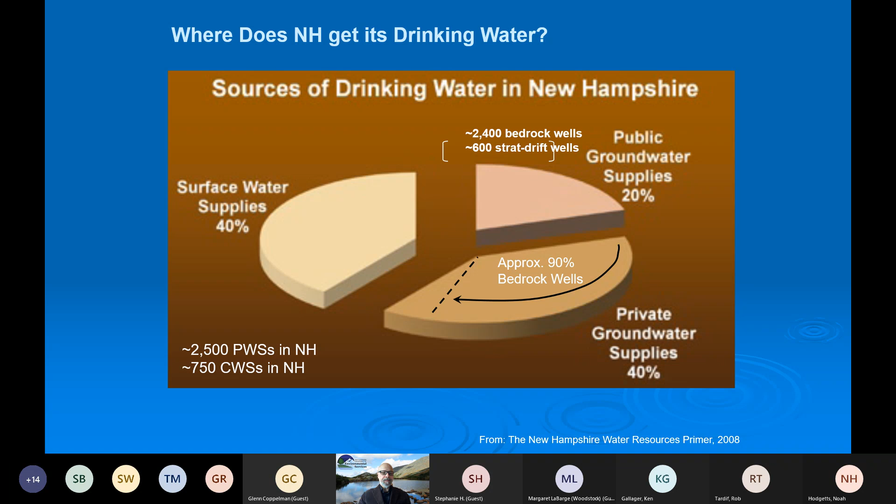Point well is a common feature largely in near shore or lakeside environments, not so much outside of an environment strictly like that. Dug wells tend to be relic sources these days, but they still get installed every now and then in the state.

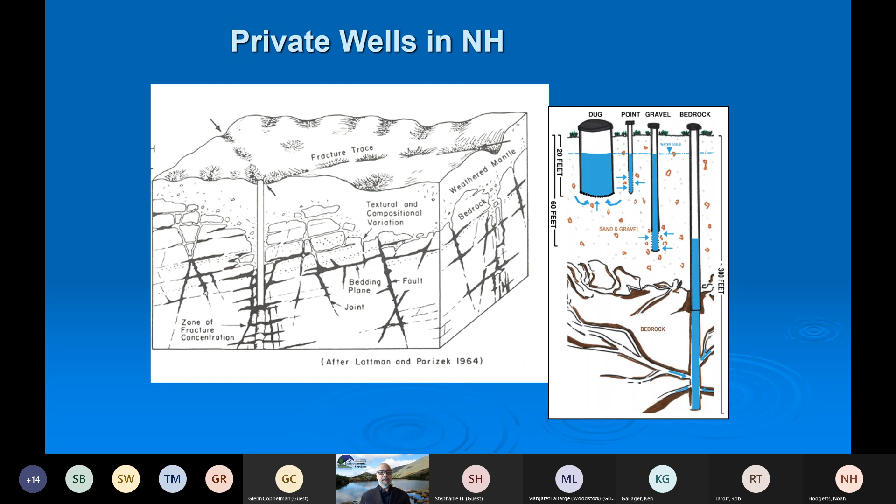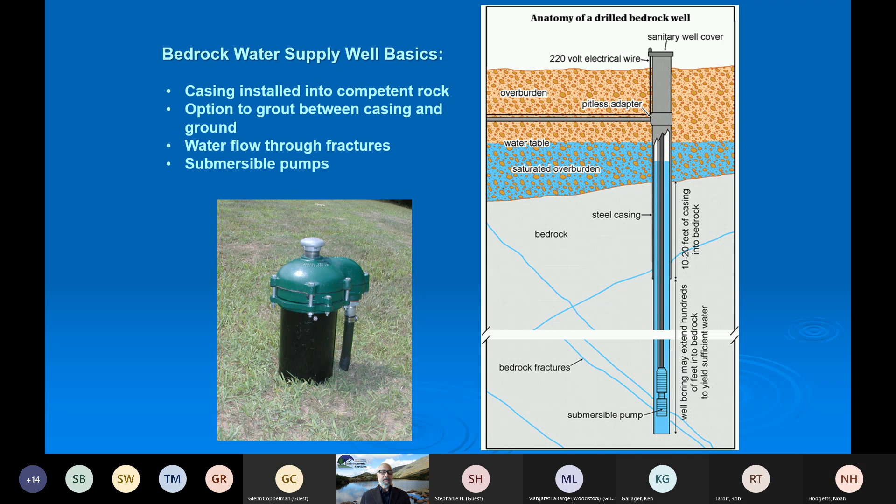Close up of what most people have in their backyard who are served by private wells in the state. Basically, the casing that sticks above the ground is a very small portion of the entire well. Effectively, that steel casing usually extends 20 to 40 to 50 feet into the subsurface. In some instances, as much as 150 to 180 feet until the surface of rock is encountered. It advances into rock some distance, not a long distance, and then the well just becomes a drilled open hole feature after that. Water tends to flow obviously through a fracture network, hopefully at a rate that the user doesn't exceed, and provide water to the home or structure.

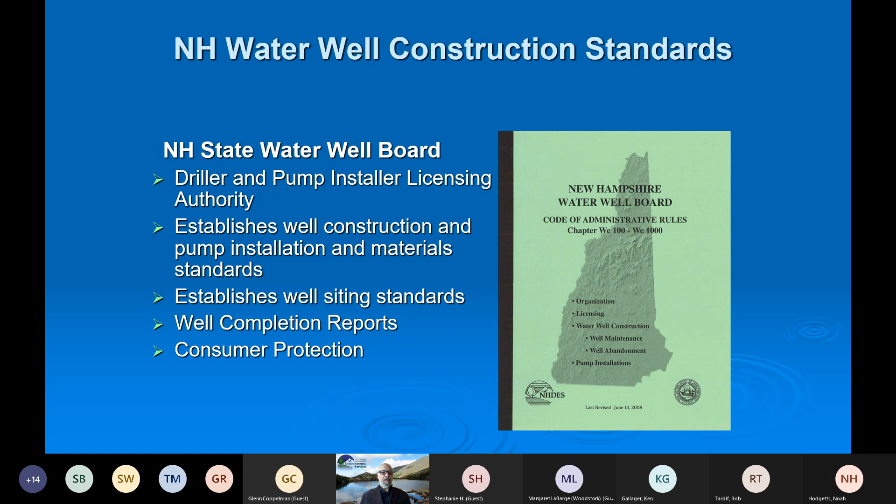The state's construction requirements related to private wells and public wells actually are embedded in the state's New Hampshire Water Well Board construction code. This code book defines not only the well construction standards that apply to installing and drilling the well and equipping it with a pump and fitting it with piping and other materials, it also establishes the authority for the Water Well Board to issue licenses to anybody practicing the business of installing wells or installing pumps in people's homes for potable water supply purposes. In addition, it establishes what the well siting standards are in the state for private wells, not public wells, but private wells. And those standards, some of the siting standards and setbacks, are what I'm just going to briefly touch on today. And then it also establishes the requirement that any water well driller in the state that installs a well must submit to the state a water well completion construction record, identifying where they installed the well, what it's used for, and the typical construction parameters of the specific well they installed.

Now, what has been noted over the last 10 to 15 to 20 years is that we've got a relatively substantial increase in the number of setback issues encountered due to the fact that lot sizes are becoming smaller. Lots are being developed on property that no one ever really thought was developable due to steep slopes, proximity of surface water, or wetness of a particular area. More and more we are encountering requirements for drillers to follow the setback reduction program within their rules in order to install a well on a property without necessarily meeting all the setbacks. These setbacks can be reduced conditionally on a case-by-case or lot-by-lot basis if the driller takes special methods to construct the well.

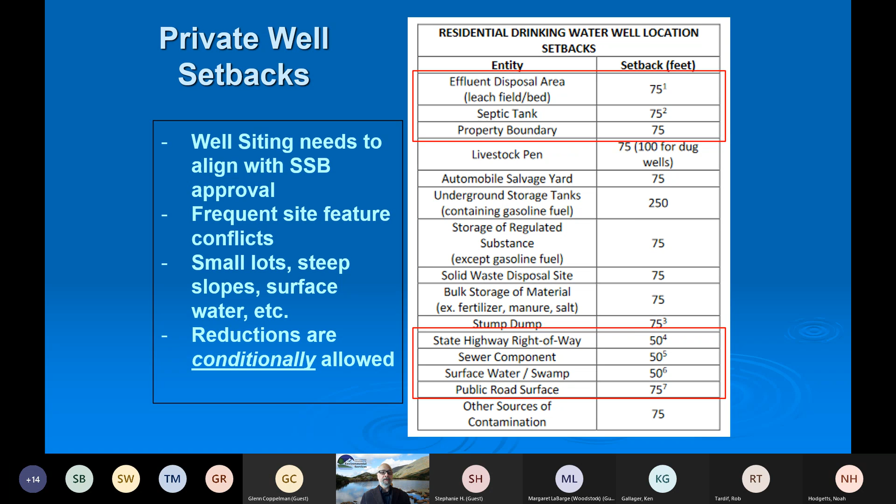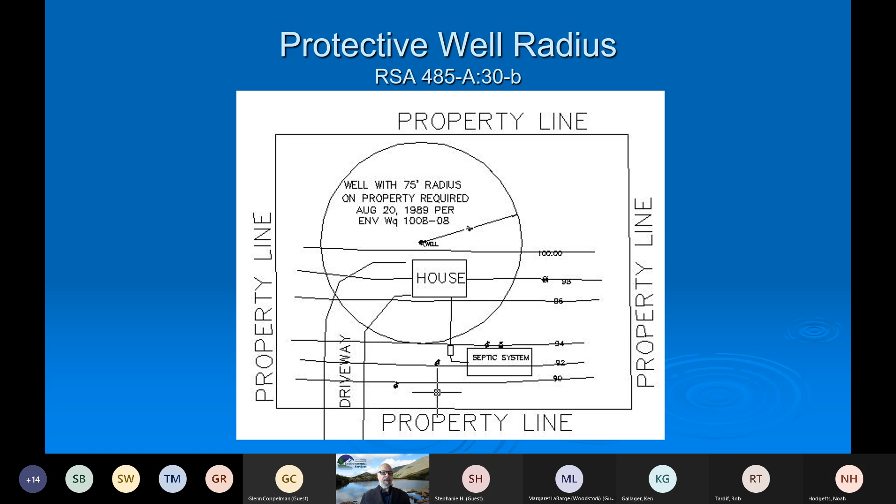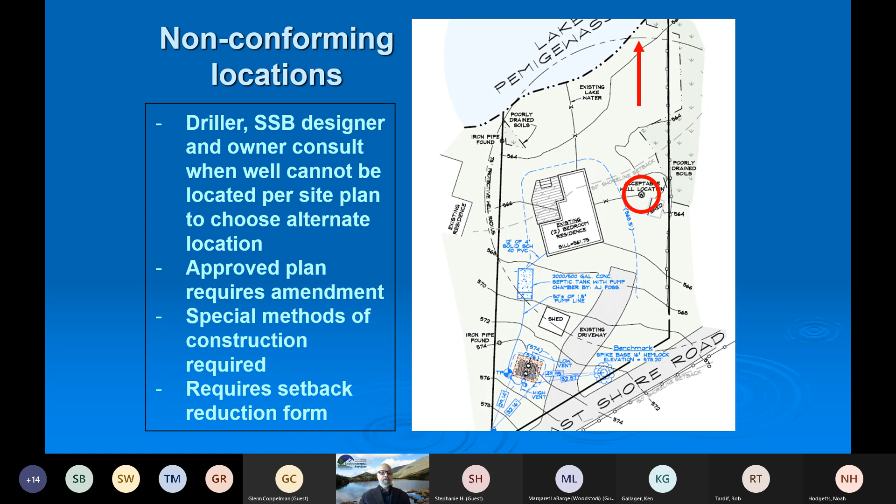So effectively, the closer this non-conforming structure moves to the well, the more casing you will need. Now, no one expects anybody to do math in the field. But before I leave this, I want to point out this reduction allowance is for existing lots only, that have an existing lot of record for their creation.

The septic system setback reduction allowance is not extended to newly created lots that are proposing or submitting a new subsurface bureau application as part of their lot creation process. The reduced setback for septic systems or septic leach fields is available only for existing lots of record.

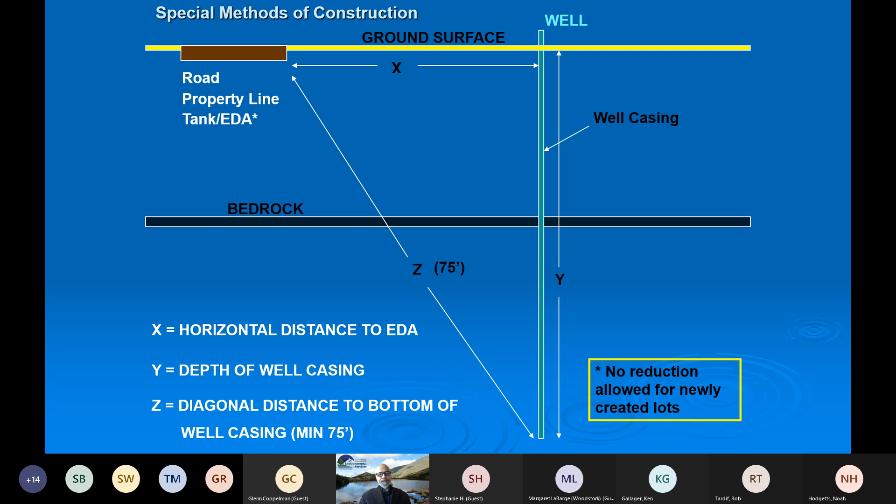So the water well rules available to the water well drilling community include a table within their rules where they can just look up the distance they have to reduce the setback to, run across the table, and pick up the required minimum of casing they have to install in the well to meet the special method of construction criteria. So it's pretty easy for contractors to follow this process.

Additionally, at the private well level, the 75-foot protective radius around the well is, under the rules, allowed to overlap onto neighboring properties. I'm not going to go down that path too much because Rob Tardif is going to touch on it in his discussion about subsurface bureau requirements.

But it is allowed, protective radii are allowed to overlap onto other lots. That overlap is identified in the subsurface bureau application, and it requires a release form where the owner of the well with the overlapping radius has to sign, acknowledging that they're overlapping onto someone else's property, releasing that entity of any liability, and acknowledging that they can't hold any neighbor to restrictions on the neighbor's property.

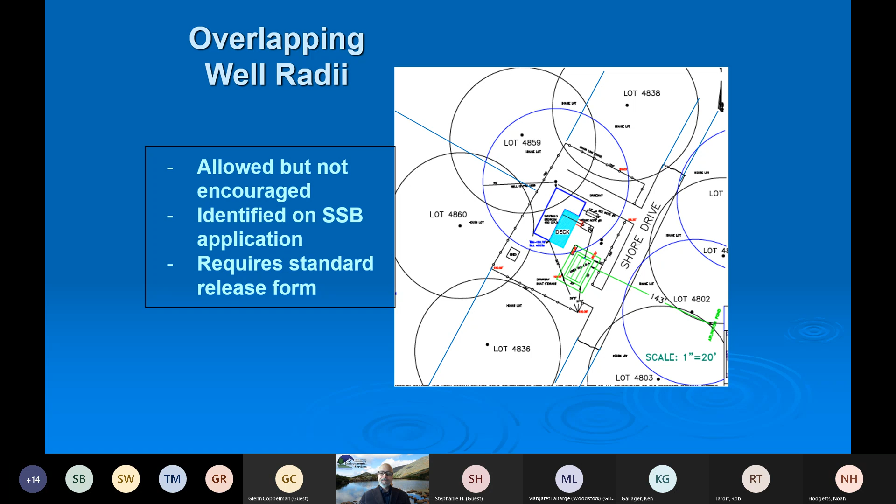Now, Noah asked me to touch on water quality testing, and I need to state flat out: within the state of New Hampshire, there is no requirement to sample private water supply well water quality. There have been numerous legislative attempts over the years to establish a private well water quality testing standard, either on new home construction or real estate transfer, but those efforts have not been successful.

The department, however, sees this as a substantial public benefit to have private well sampling. We have a staff member dedicated to private well sampling outreach, and multiple programs running concurrently to offer and encourage private well owners to sample. It's tethered to the fact that public health in this state is tethered to the water quality coming out of private wells, and we live in a state with substantial naturally occurring contaminants that do have public health impacts over the long term.

Here's our recommended list of water quality standards, or sampling program, that we recommend to private well owners. A lot of it's focused on naturally occurring contaminants, but we've also added perfluorinated compounds for good reason, and VOCs associated with the ubiquity of those cultural contaminants in groundwater in this state.

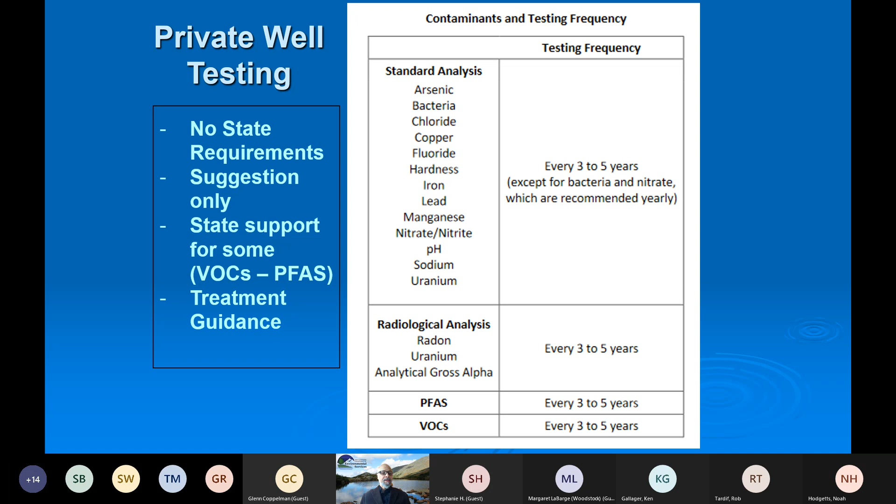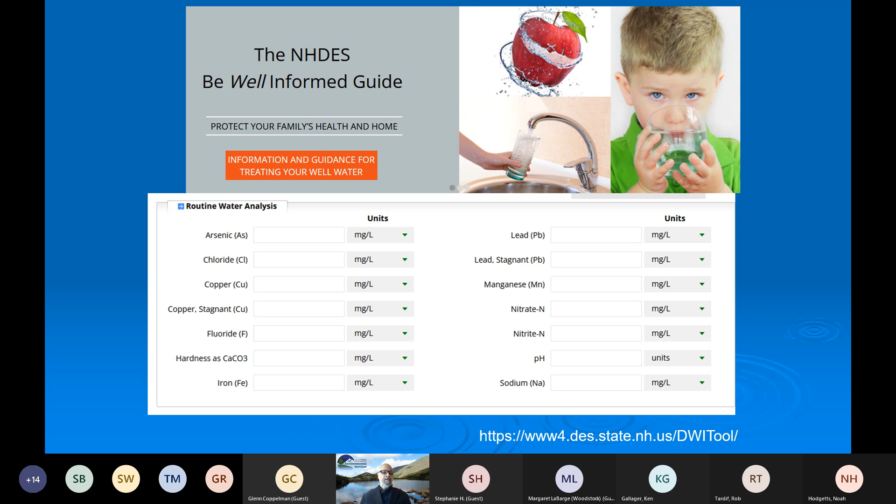We also provide a website where someone can log in and enter their lab data for their water quality, and not only get a summary of which parameters exceed drinking water standards, but also a detailed breakdown of the type of treatment that will work to reduce that contaminant below the drinking water standards. It's received a lot of national recognition, has been taken by the EPA and converted into common code, and many other states have built their own sites mimicking it. It's a very successful program.

Now moving on to public water wells, community water supply wells in the state. A community water system is a public water system that supplies the same population of 25 or more people year round—cities, towns, villages, precincts. But additionally, small water systems also include cooperatives, manufactured home parks, condo complexes, homeowners associations, as well as standard single-family home residences built in an open space or cluster subdivision, which are commonly small community water systems.

The requirements for small community water systems are dictated in the state and federal Safe Drinking Water Act, and the criteria for new source approvals and system design are built into the department's administrative rules for well siting criteria and water system design. When I say small community water systems, I mean systems built to serve a population of less than 1,000 people—that's how it's defined in this state. More than 1,000 people served means it's a large community water system, meeting a different set of design standards.

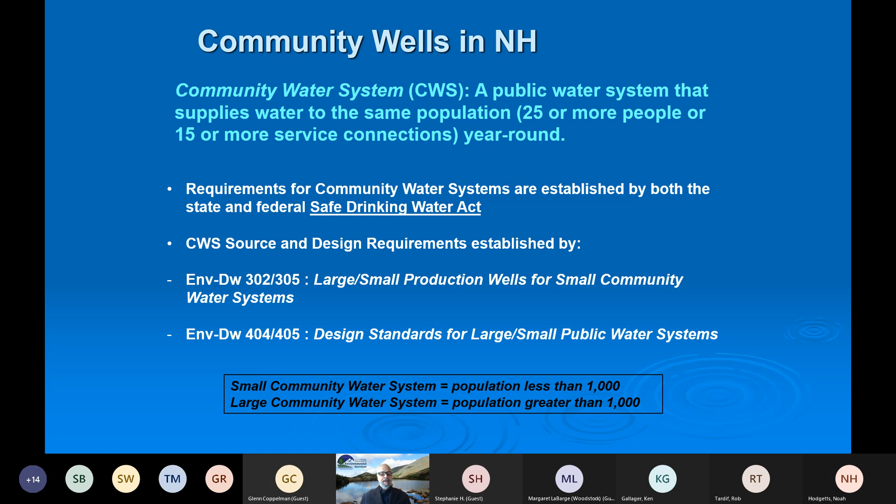So the radius requirements around a community water supply well are very different than for a private well. They are not locked into a max of 75 feet; they depend upon the size of the water system. The radius around a water supply well cannot have any cultural development, must remain in its natural state, cannot have any structures other than what's needed for water supply provision, and can receive no discharge or drainage from any site feature, like a detention or retention pond on the subdivision.

That table I'm showing you on the bottom right is the table of radius distances, or the size of the radius relative to the production volume required to be developed for the subdivision. The example on the lower left is a typical calculation of what's required for a water system based on the number of units and bedrooms.

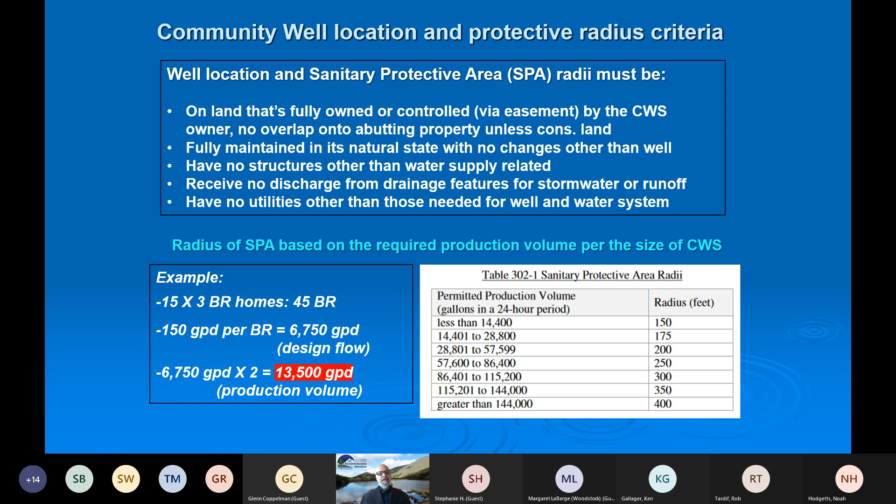The example I'm giving you is a 15-unit subdivision where each unit has 3 bedrooms. The criteria is that 150 gallons per day must be developed and tested for each bedroom, which equates to about 6,750 gallons per day. That design criteria then has to be multiplied by 2.

The highlighted red value, 13,500, is what a subdivision developer has to test for the production volume of their well. Here's a quick example from Kingston, a submittal from last year. This is a 22-unit subdivision with 2-bedroom units, 44 bedrooms total. Highlighted in yellow is what the project needs to develop: 13,200 gallons per day, equivalent to about 9 gallons a minute.

When you look up the equivalent value on the radius, the protective radius around the well is 175 feet, shown in the blue circle below.

A very common practice in an open space or cluster subdivision is to site the well within the open space. It's a very good joint use of that space. As shown here, that circle is bounded by the property lines, does not go over it. There's no development within it, and it's dedicated to providing that area just for the water supply well.

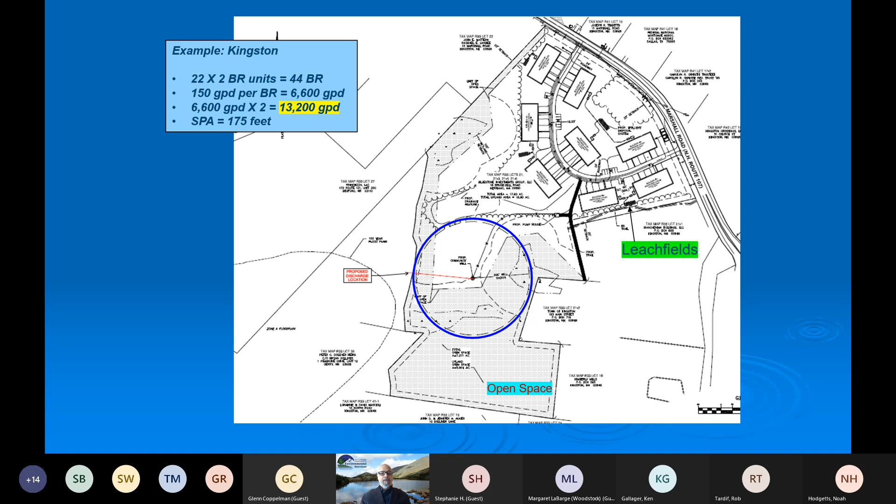The community water system owner has to own or control the well site and the radius via a perpetual easement, which is demonstrated at the time of the application for a new water system.

Again, this particular project points out that the joint use of the open space and the community well is a very supportive joint use.

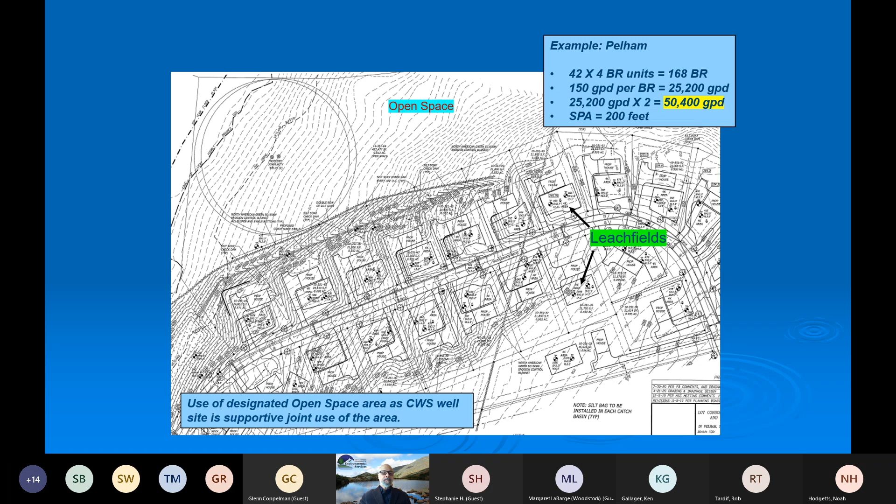That sampling program identifies which parameters exceed drinking water standards and which do not. For those that exceed, it also defines the water system treatment requirements that have to be designed as part of the water system design.

When the water system goes active, there's a lot of scheduled and routine water quality sampling that occurs, starting in the first year and continuing during the whole life of the community water system. Many parameters are sampled on a substantial schedule ranging from weekly to monthly to annually to 3, 6, or 9 year intervals depending on the parameter.

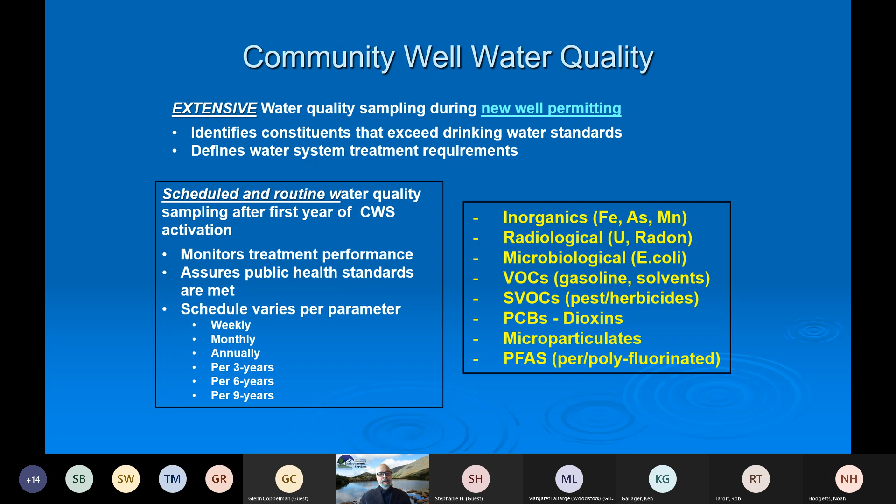Take it away, Rob. And Rob, just before you get started, we do have one question in the chat now from Glenn Coppelman for you, Steve, asking, would a water system for an assisted living facility fall into the category of community water supply?

Absolutely, dependent. If they serve more than 25 people, yes. Okay, great. Thank you.

Good morning, everybody. My name is Rob Tardif, administrator of the Subsurface Systems Bureau within the Department of Environmental Services.

I'm going to briefly talk about our lot sizing criteria. I wasn't intending to get too far into the septic system design criteria, but if there are questions, I can do my best to answer those as well. I'll give a brief overview of the Bureau and how we came to be.

We have the administrative position, which is where I am, and then basically four fundamental groups to the process: the plan review group, the construction inspection group, a small enforcement group, and administrative or support staff who receive applications, give them an administrative completeness review, and answer the phones.

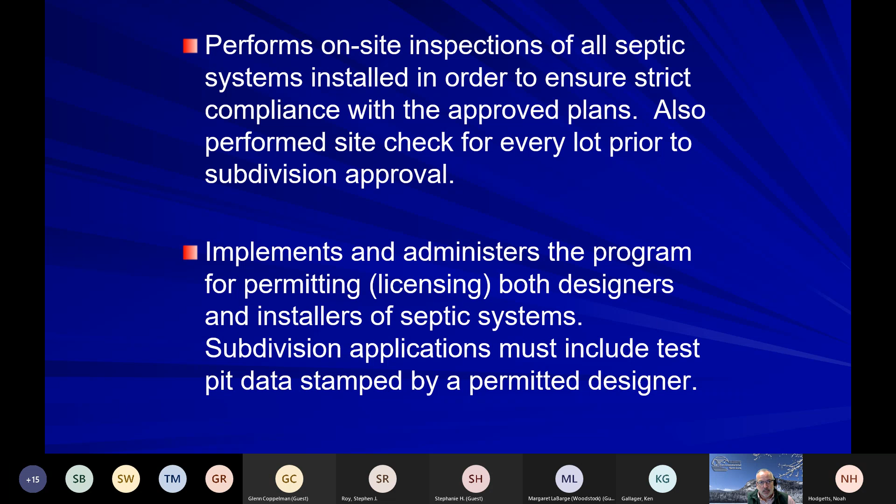Another thing we do is permit all designers and installers in the state. To submit a design, you'd have to be a permitted designer, which is also part of the subdivision application. To construct a system, you have to be a permitted or licensed septic system installer. There are currently provisions in statute allowing homeowners to design and install systems for their own domicile, meaning the place in which they currently live.

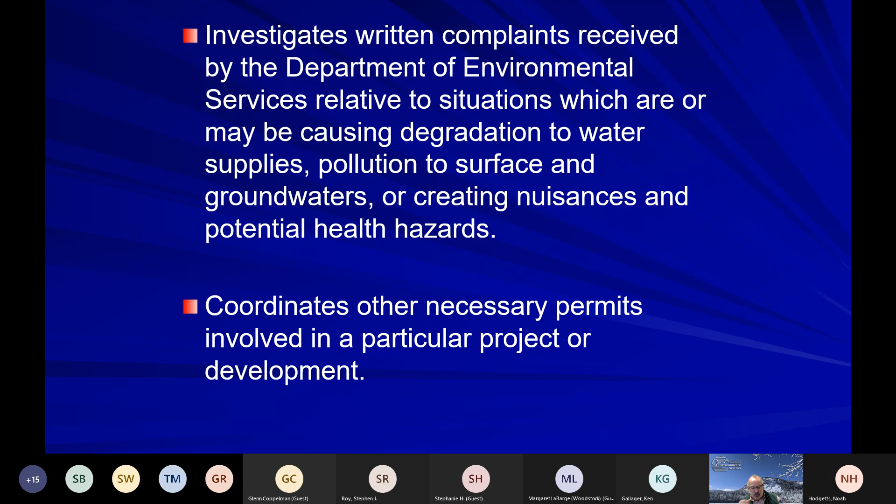Just a real brief history of how we came to be. Back in 1965, there was what was called the island rule: if you were proposing to dispose of wastewater on an island, you had to have an approved system. Back then, it was the Water Supply and Pollution Control Division that would approve these requests.

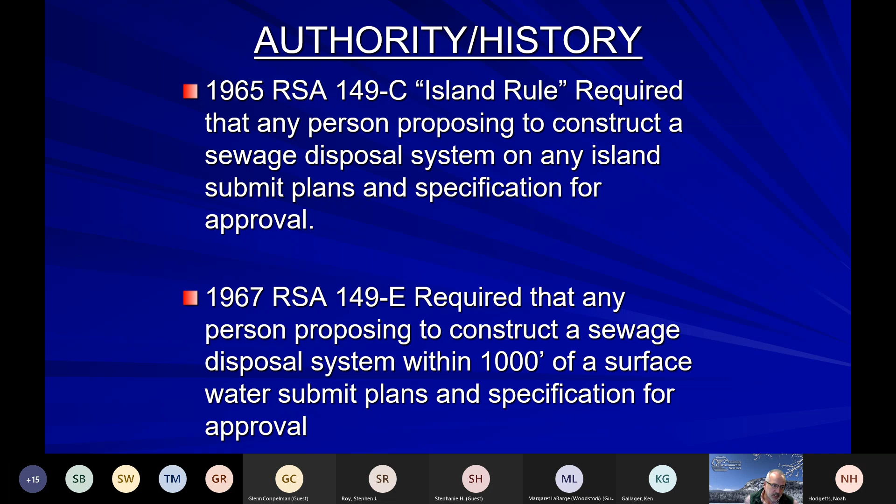In 1967, the legislature said, if we're doing islands, we should do mainland properties too. So it was dictated that anything within 1,000 feet of surface water would need an approval. Later, the decision was made that if we're going to do it within 1,000 feet, let's just do it everywhere. So the language in 149-E removed the term 'near shorelines,' which was defined as 1,000 feet, effectively making it a requirement that any property disposing of wastewater would need an approval from the state.

Again, it was still the Water Pollution Commission at that point. But in 1989, the Department of Environmental Services was created, and RSA 485-A, our current statutes, was codified. So again, that's a brief history of how we came to be.

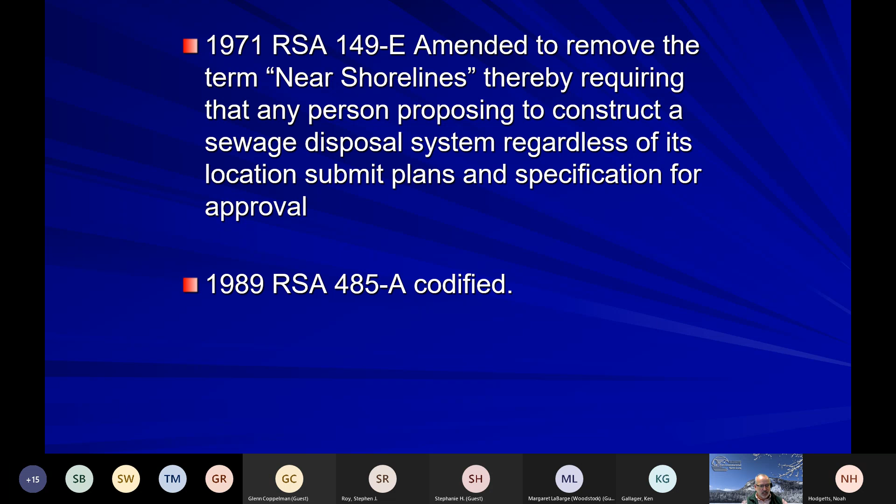So again, I'm going to focus more on subdivision requirements. In 485-A:2, Roman 13, there's a definition of subdivision, and it's a very long definition, so I wanted to break it up into the important parts. It's when you subdivide a piece into 2 or more lots - for immediate or future sale, rent, lease, or building development, you're going to need subdivision approval. There are allowances in the definition for simple lot line adjustments that would not require subdivision approval.

The definition does include condominium conveyance. For instance, if there's a cabin resort, individually owned cabin resort out there, and the property owner wants to sell, and the potential buyer wants to condominiumize those individual cabins, that would take subdivision approval. Those scenarios are most of the time very difficult to obtain subdivision approval because of lot loading, which I'll get into in a second. But in any event, any condo conversion requires subdivision approval.

Then the last bullet here talks about if you have 2 smaller lots and you want to combine them to make a bigger lot, that would not require subdivision approval. Again, there's a very long definition in 485-A:2, Roman 13, that kind of covers all that.

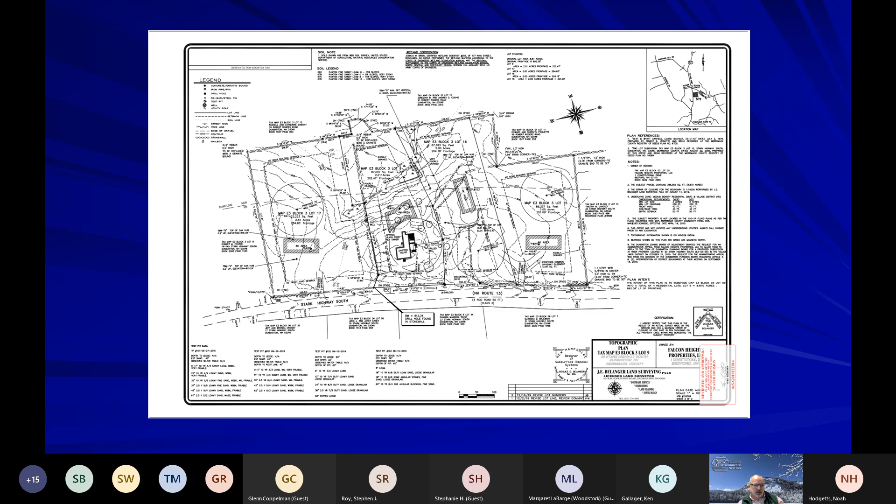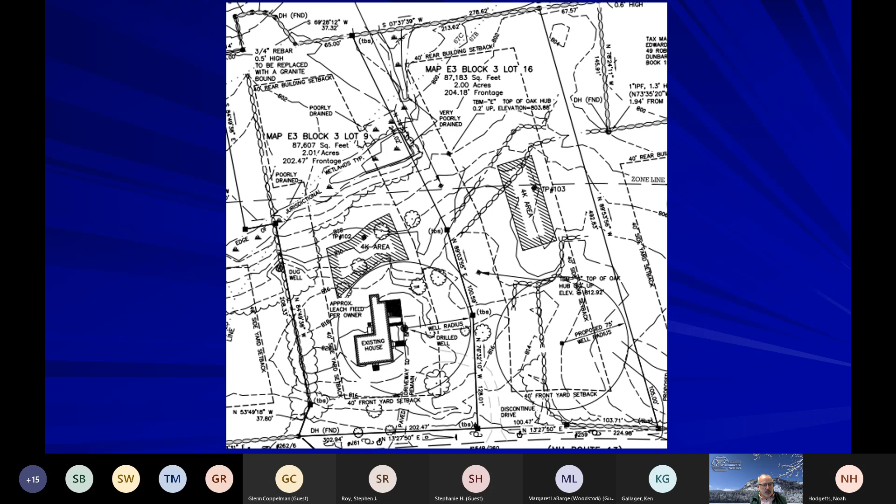At subdivision level, what has to be demonstrated is that each lot being developed can support a minimum of 600 gallons per day. For residential applications, that's a 4-bedroom home. If it's not residential or commercial, it may be different—there's a table in our rules with design flows for specific types of commercial operations. But at a minimum, it's got to support 600 gallons per day.

Keep in mind, a perfect 1-acre lot—well-drained soils, flat, no wetlands, nothing to subtract—can support 2,000 gallons per day by rule. So it's not very difficult to have a relatively small piece of property meet our subdivision requirements. That gets back to my initial point that everything we do is soil-based, lot-characteristic based, not just a general standard.

For instance, when I moved into the town I live in, minimum lot sizes were 5 acres. I don't think there was any technical reason for 5 acres except maybe to limit development. The lot I live on now is 5.01 acres, just enough to meet the town's minimum lot size requirement. So when you go to demonstrate what a lot can support, there is a formula in our rule.

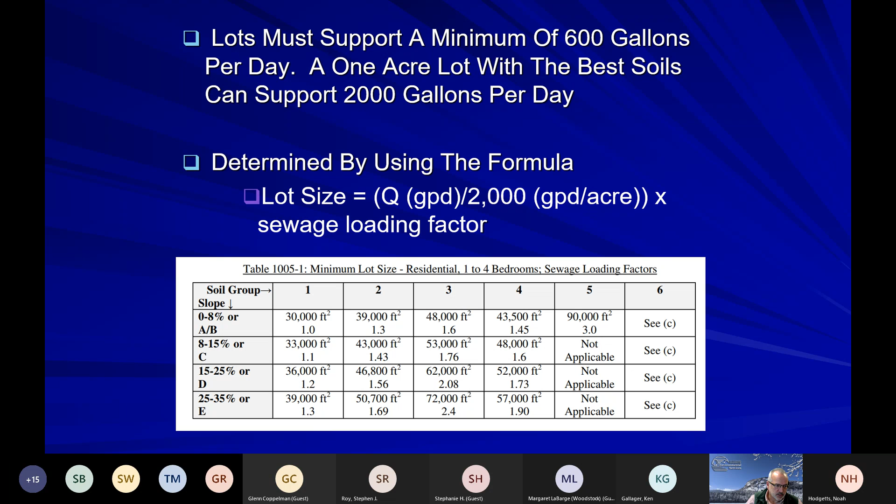On a perfect lot with group 1 soils and minimum slopes, by that table, the minimum lot size would be 30,000 square feet. If you have a property with on-site wastewater but an off-site well, you don't need to subtract that well radius, so the minimum lot size is decreased. And in scenarios where you have off-lot wastewater and off-lot well, we wouldn't necessarily get involved—the minimum lot size would be dictated by town or municipal ordinance.

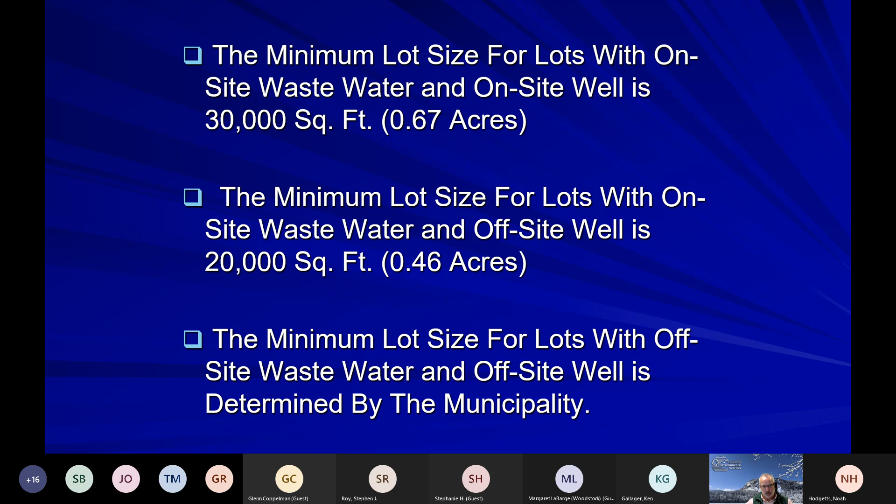So now we can get into conservation, cluster, open space development. There's a number of different names for these types of development. In these scenarios, you can reduce lot sizes, but the bottom line is the amount of land is still going to be pretty much the same as it would be on a standard subdivision, and that's my own term here, not a rule.

What it takes in a cluster subdivision is an open space lot. Between all the property, the smaller individual lots, and that open space, the calculation is still made to determine that the previous parent lot being divided up can still support the sewage load as calculated by that previous formula. So while you can group the houses closer together, the minimum land required doesn't change much from larger individual lots.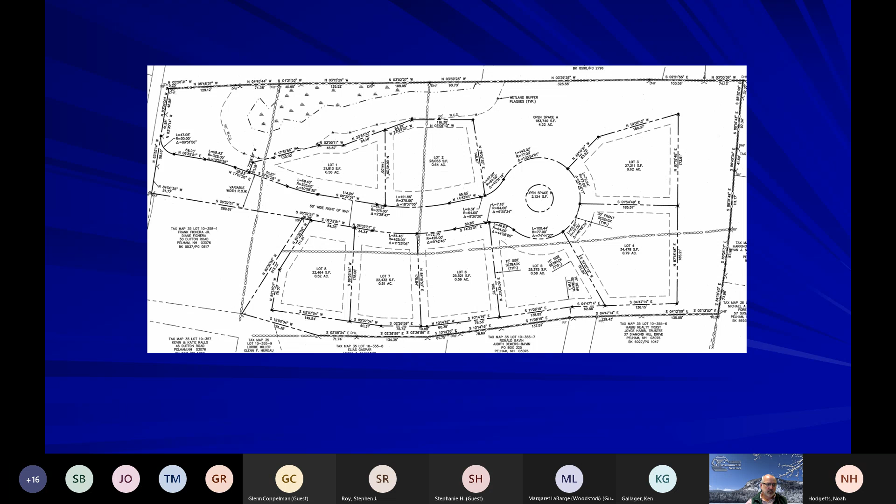So if I go to the next slide, this is more of the development. In this scenario, again, there are many different scenarios for cluster subdivisions. In this case, you have individual wells, overlapping well radii, and you also have that area I was talking about. So in this scenario, it was proposed that each lot still has an individual sewage disposal system, an individual septic system. That doesn't necessarily have to be - you could put sewer pipes in the ground and have that individual sewage disposal system somewhere out here on the conservation land.

Different scenarios for different lot characteristics or different needs or wants by the developer or the potential buyers. There are pros and cons to everything if you think about it. Me personally, I would prefer to have my own septic system. That way I'm not depending on all my neighbors not to do certain things that could prematurely fail the septic system - grease, paint, coffee grounds, all kinds of stuff that people may not think about that they shouldn't be dumping down into their septic systems. If I have control of my own, it's up to me as to how that system is treated.

It's the same sort of thing with wells. Do I want to - and again, this is a personal preference - do I want to have the same water supply and have to pay water supply bills and things like that? Whereas if I have my own individual well, I'm going to be responsible for that well. But again, I'm responsible for that well - I don't share that responsibility with others. So there are a number of different scenarios that can be used in these developments.

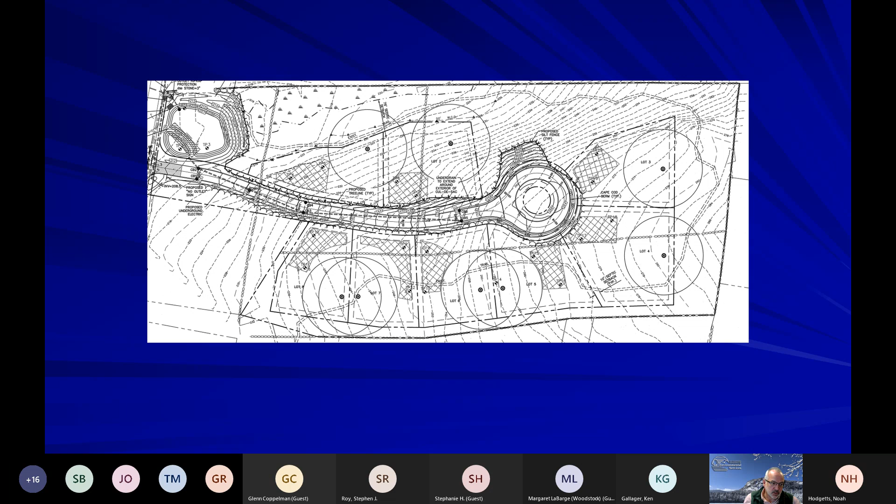Condos are very similar to cluster subdivisions. I mean, again, the bottom line is the parent lot on the condos has to support the sewage load based on the soil characteristics.

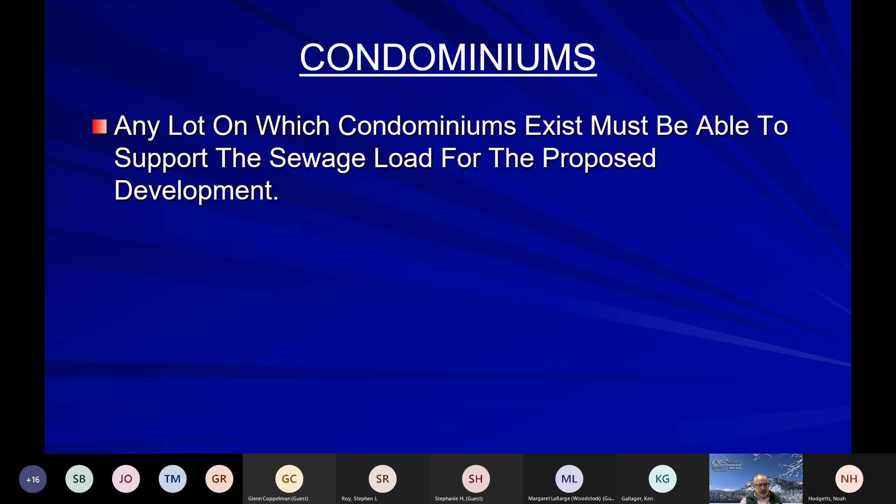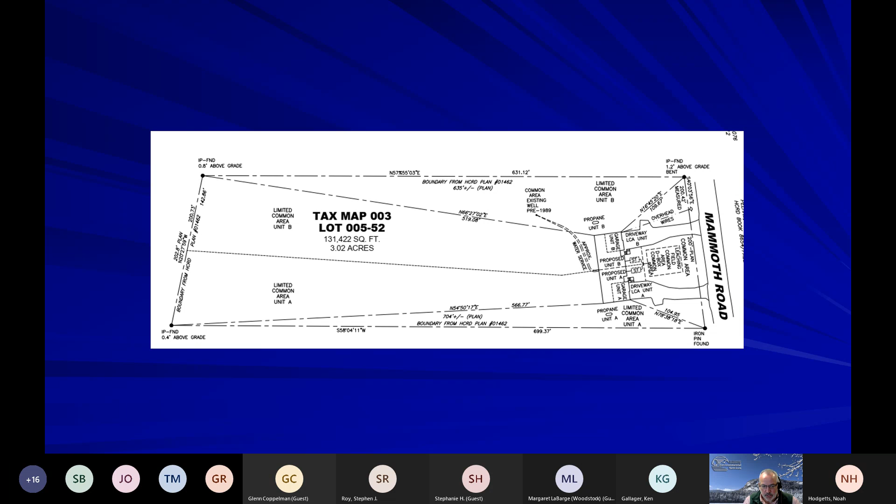And this is an example of just a duplex, a condominium duplex. You can see the parent lot is required to support the sewage load of these two-bedroom condos. You see this limited common area - it's still all common, but this limited common area kind of dictates somewhat of personal ownership, not quite personal ownership, but effectively personal ownership of an area of the lot. But again, the bottom line, the takeaway here is the lot has to support the entire sewage load.

Again, very similar to manufactured housing, it's got to support the sewage load based on soil characteristics.

And I just wanted to end with a quick note on innovative technologies. Those technologies are approved by a committee here within the department. The rules governing those innovative technologies are within the Subsurface Systems Bureau rules, but the committee is made up of people from Steve's group, people from wastewater engineering, people from the legal unit, and staff from the Subsurface Systems Bureau. And these applications are submitted, they document that they meet certain criteria, and then they get approved for use.

The point I want to make on those is what these innovative approvals do is allow for reductions or waivers to septic system sizing and setbacks. The setbacks typically are setbacks to seasonal high water table, not necessarily setbacks to property lines. The real takeaway is that they don't allow for a reduction in lot loading. The thought there is if the innovative technology system fails, we can at least be comfortable with the fact that the lot still supports the entire sewage load.

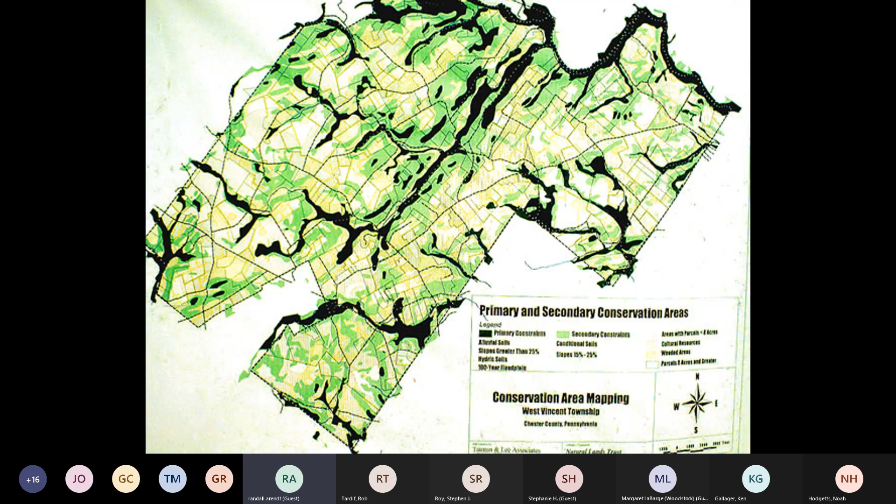Focusing in on a map like that, we can see the conservation lands pre-mapped by the community, which helps developers so they don't flounder around quite as much in terms of where should I put the conservation land? In the woods, on the farmland, where?

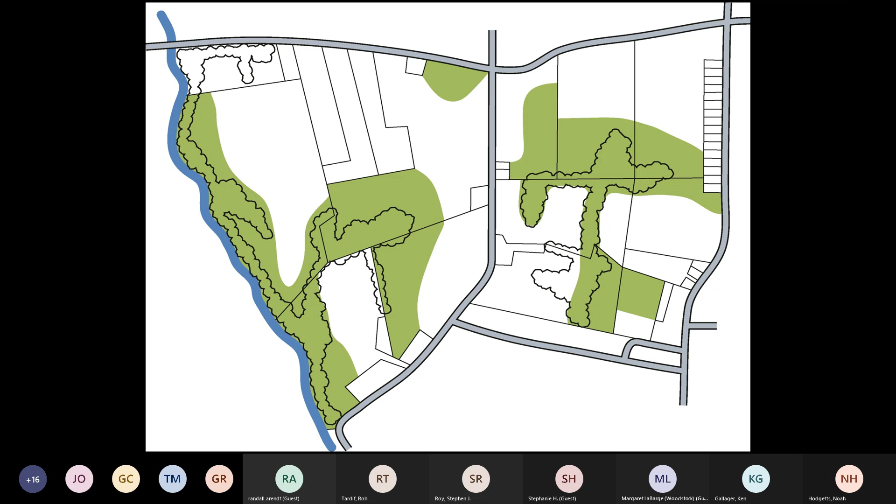And this community basically mapped out its woodlands and the stream valleys that lead down into the rivers. It said, develop our farmland, preserve the little bit of woods we have. This is from York County, Pennsylvania, where woodlands are pretty rare. So in New Hampshire, the opposite would probably be true. You might want to save your farmland, number one, and build in the woods, which are abundant.

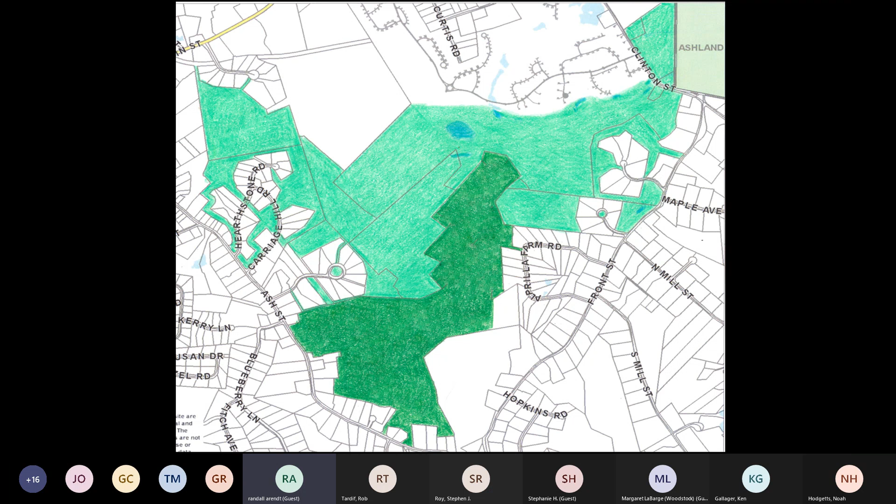This shows the green land in Westford, Massachusetts that was preserved the old-fashioned way, by buying it with public dollars or appealing to landowners to donate easements. All the light green land is land that came through the subdivision design process. Westford, which is almost on the New Hampshire border up near Lowell, adopted conservation subdivision design two decades ago.

Excellent experience with it. Choosing which site features to protect and which to build upon is pretty much your number one decision. If you want to save the woodland, you put the homes in the farmland. And if you want to save the farmland, you basically put the homes in the woodland.

If the lots are too small for both an individual well and an individual septic, a community well could be in the open space, or a community septic system could be in the open space. And there are variations on that too, because for 20 homes, you might have 7 smaller shared systems instead of one large system for all 20 homes.

Site visits are absolutely essential to discover and evaluate the site features. Planning board members, no matter how good they are, can't really tell what a property is really like by looking at a piece of paper. It doesn't work. So this should be mandatory for all planning board members.

If you're afraid of snakes, spiders, ticks, fine. Let's appoint you to the library committee or the finance committee or the school board. You don't belong on the planning board if you're not going to be able to go out with boots on the ground. Now, if you're temporarily sick, you've got a broken leg, you're excused. You're away on vacation, you're excused. But generally speaking, a planning board member has got an obligation to walk the property. Otherwise, they really can't make an honest evaluation of where to put the homes and where to put the open space.

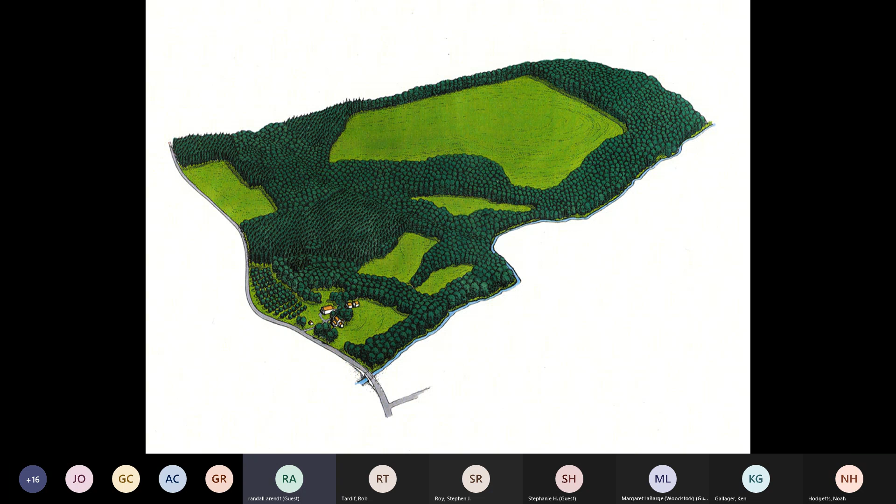So here's a piece of land before development. And this is your conventional yield plan with 1 acre lots in the 1 acre zone, 2 acre lots in the 2 acre zone, 3 acre lots in the 3 acre zone. There's really no open space, everything is a house lot or a street, but it tells you the lot yield.

And I would normally do perc tests on 10% of those lots, which are the most dubious. This lot here is highly dubious with all the green area that is not good for septics. Some of these lots down in here could be dubious. Lots in here should be very, very good for septics. But I'd like to have a 10% sample where the town or the town engineer chooses the 10% of the lots, 3 out of 30, that raises eyebrows. And if those pass, then I suggest that is a good number to begin with for your yield plan, your total lot count.

Now that doesn't mean that you don't get really serious about the septic later on. You do, but are we talking about a 30 lot subdivision, a 35 lot subdivision, a 25 lot subdivision? Developer might come in with an airy fairy make-believe plan, and you got to inject some realism in it. No sense designing 35 lots in a conservation design only to find out that he's only got soil for 30 or 28.

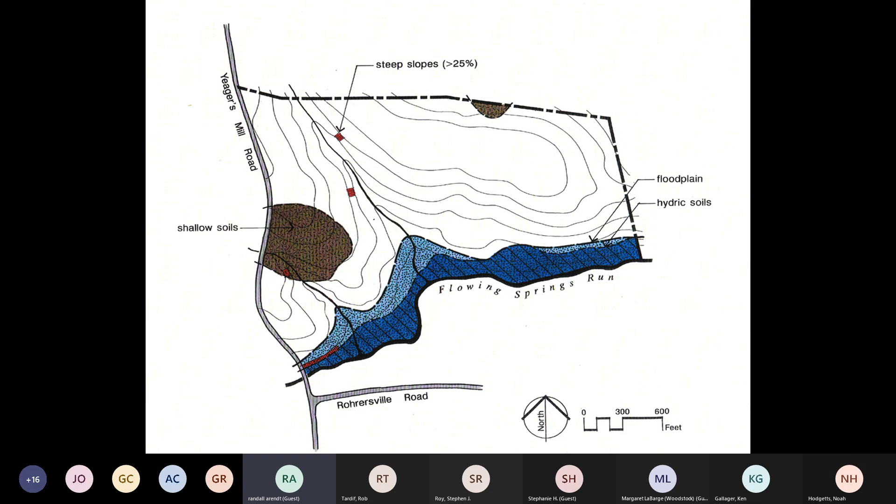So step 1, primary conservation areas, is step 1A: shallow soils, wet soils, floodplains. Then that's what that kind of looks like.

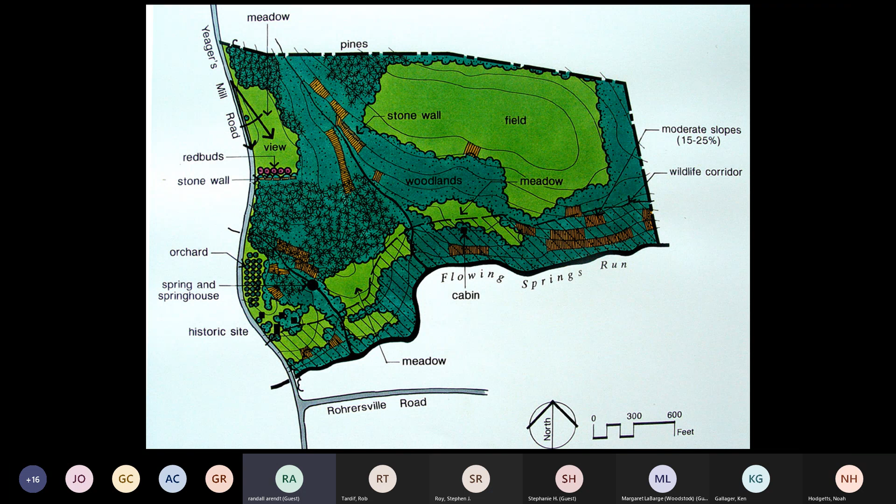And then step 1B, which is secondary conservation areas that are buildable, like the farmland in green, the woodlands in dark green, the historic farmsteads here that you want to preserve, the stone wall that you want to preserve, the view shed in from the public road that you want to preserve. All the things you want to preserve are shown in step 1B. And that is a typical view of upland, which is buildable, but you want to maybe design around the stone walls and use them at the edges of roads or the edges of house lots. Let's get creative.

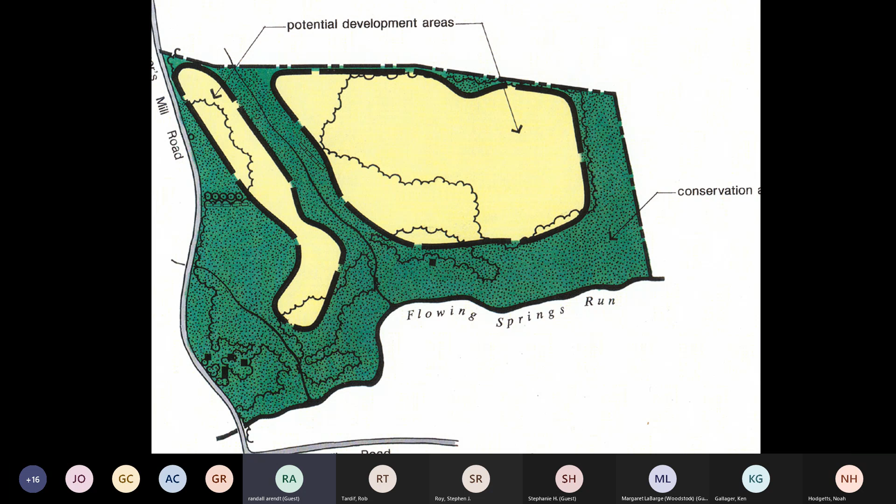So at the end of step 1, you end up with the green areas to preserve and the yellow areas, which are fine to build on and not the highest priority for preservation. So step 2 is to populate the buildable areas with the houses that meet the yield plan number.

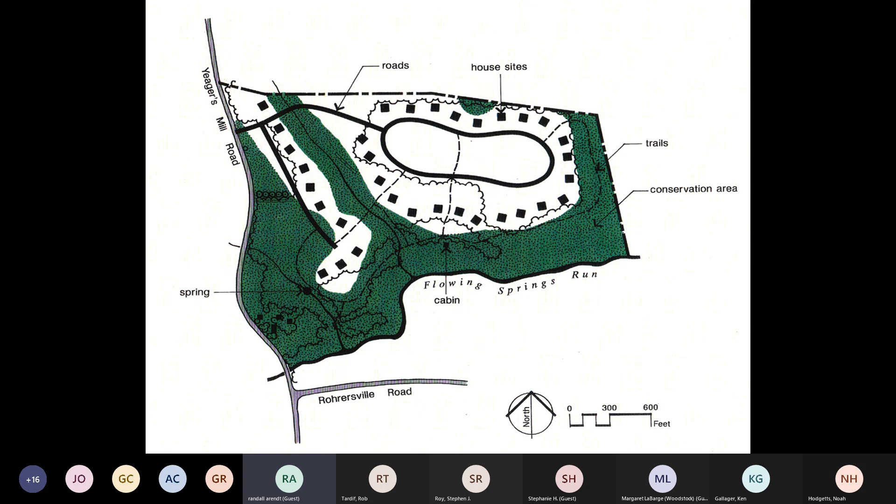Then this is where the engineers come in big time with streets and trails and roads and septic system locations, and then drawing in the lot lines, which is the least important part of the whole thing. Legally, you don't even need them. You could be totally condominium. But most people like lot lines, I do, and I put that into step 4.

I've got these slides I can give you if you want to do a presentation in your own community. I do presentations, used to do them with carousel slide projectors years ago. Then we often do hands-on design exercises after the slideshow, so people move little M&Ms around and put the houses in the areas that are not green-lined as conservation areas. It's a very helpful learning exercise for planning board members that typically follows one of my presentations.

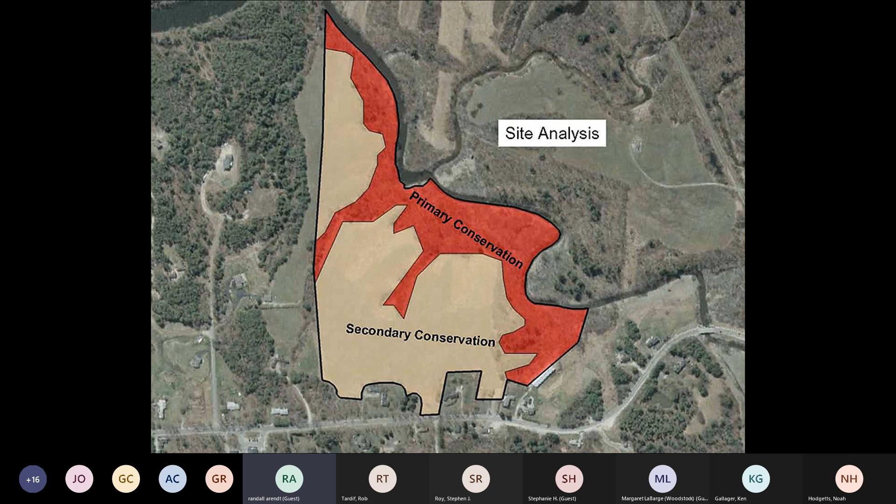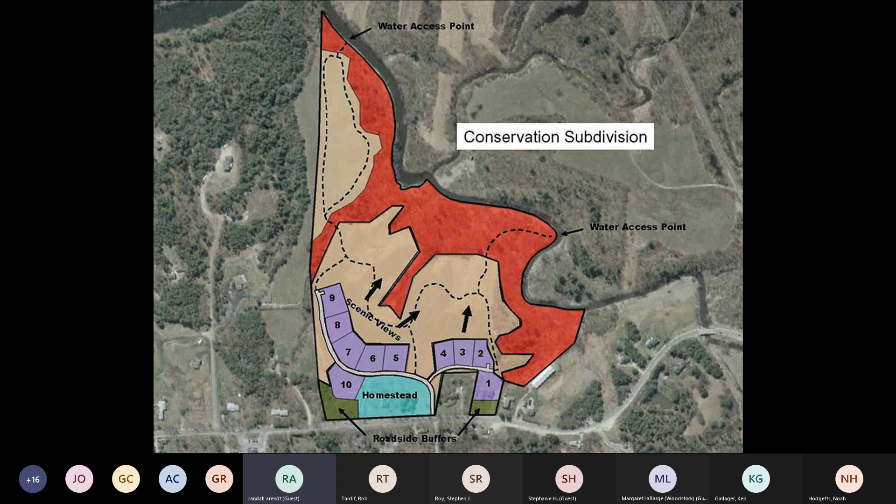The developer says, well, where do I put my homes? And the planner says, well, you put your homes on part of that secondary conservation area, like that. How's that? The developer says, well, I like that because it's a much shorter, cheaper street system. Everyone's got a beautiful, uninterrupted view of permanently preserved open space. And the septic systems, if need be, can be off lot as individual systems in the common open space, or they could be community systems, maybe a system for 3 units here and a system for 5 or 6 units over there. Many variations.

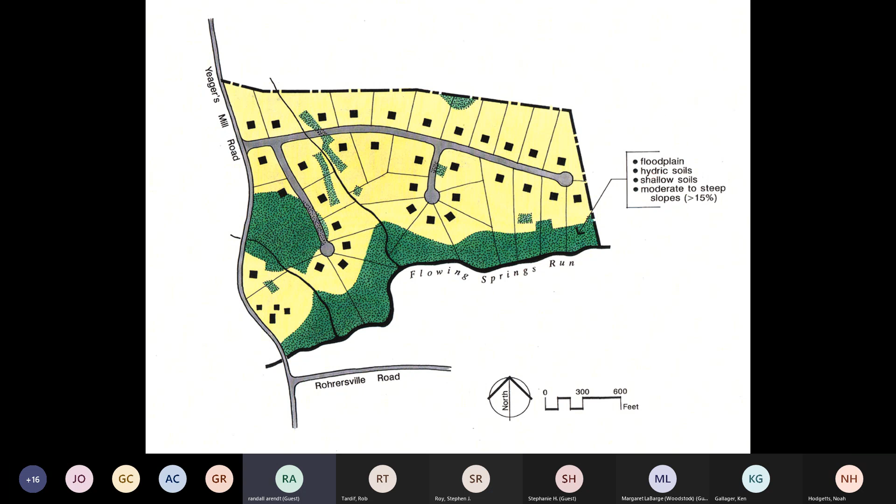Before the preliminary plan is submitted, you really need to compare 2 sketch plans: the yield plan that tells you what the normal configuration and lot count would be, plus this conservation design based upon that lot count. Here are 2 sketches too, your conventional sketch, and then converted into a conservation design.

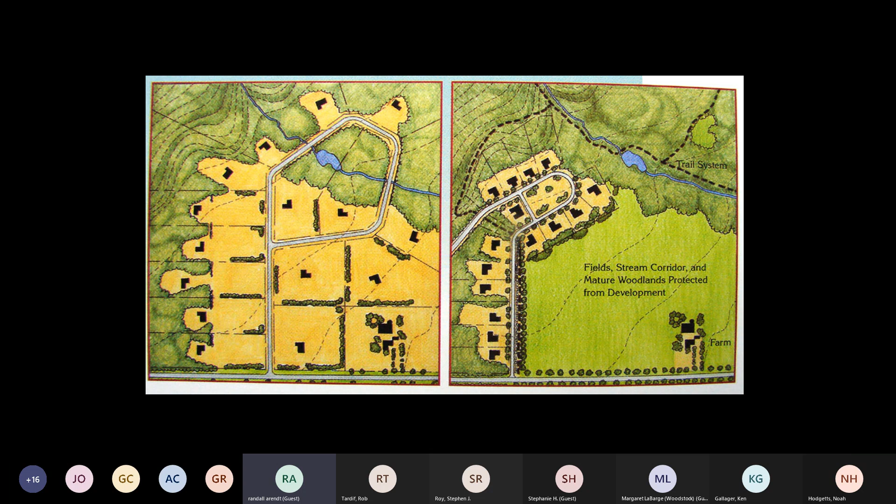Another example here, this is a sad story. The town came to me after the preliminary plan was submitted with the plan on the left, and they said, can you design something better? I said, I can, but it'll go nowhere because the developer has already spent $65,000 engineering the preliminary plan on the left. So he's not going to turn around. But they use the design on the right as a learning tool and a teaching tool for future developers.

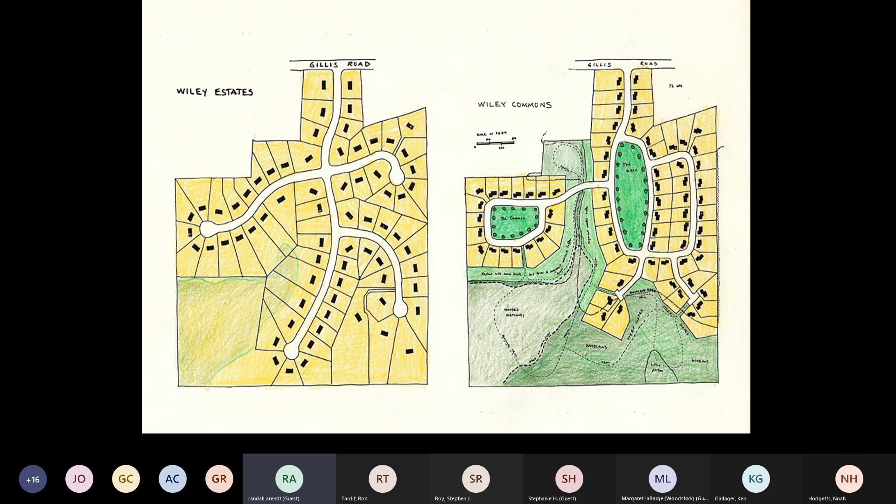So once a developer comes in with a preliminary plan for a conventional design, basically it's game over. He's not going to change.

As an extension to a village, we could do plan A on the left or plan B on the right, so the village can have some playing fields, so the village can actually have a village green. And the new village green for the entire village could be right there. So you can really make up for deficiencies in an old village that doesn't have such things.

And I mentioned Westboro, Mass earlier on. As of almost 10 years ago, they'd preserved about 450 acres of land with conservation subdivision design. Didn't have to pay a penny for it. Other towns in Massachusetts preserved 650 acres, 875 acres.

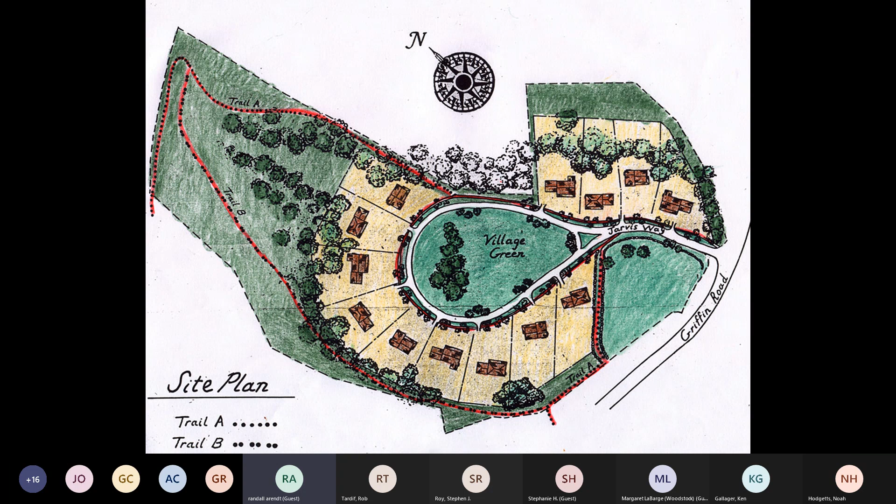Now, one option is on-lot well and on-lot septic. Jarvis Farm in Westford, where the lot sizes ranged about half an acre. At the time this was built, that met all the codes, and they had really good soils, so they had on-lot well and on-lot septic on those good soils on the half-acre lots. This turned out to be the first conservation subdivision they ever did. It's beautiful, built around a 2-acre green.

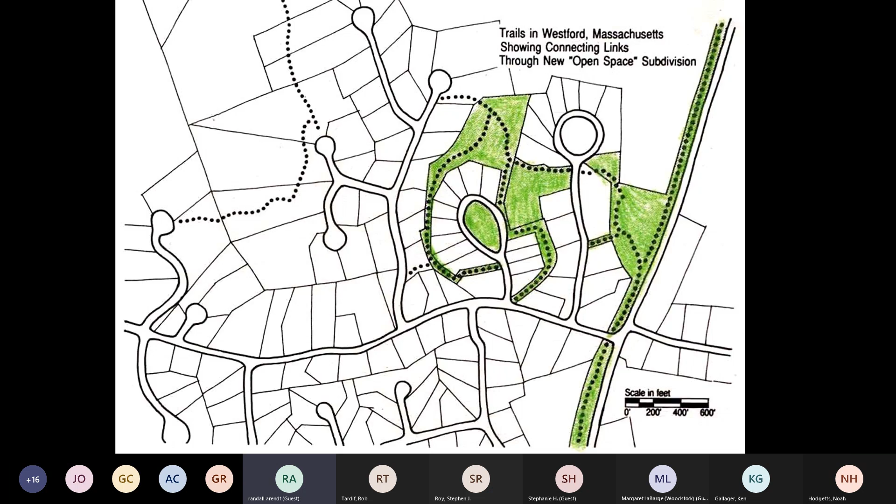And the original design, if I have it here, I'm not sure. I don't, but the original design was a conventional one. These are the trails that lead off from that subdivision.

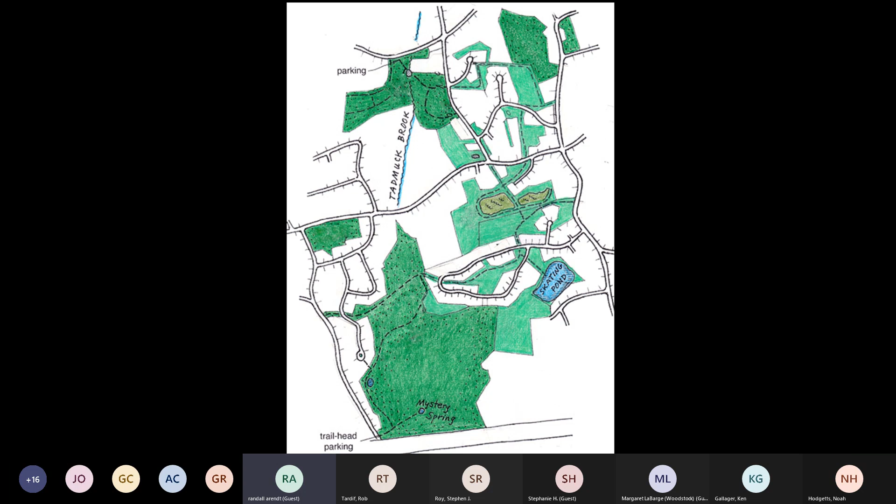This is another view of Westford conservation land. Here, the dark green is land they acquired through purchase or donation, and the light green is donated by developers of conservation subdivisions. Now, off-lot septics can either be individual or shared.

They have to be located on easements within the common open space. Important to emphasize, this flexible approach allows septics to be located on the deepest and best drained soils on the entire property.

So when you do your initial analysis of the property, if you find one part of the property is much better for septic than somewhere else, don't put house lots there if you want to have smaller lots for, say, empty nesters. Reserve the best soils for off-lot individual septics or off-lot community septics.

So this is a real advantage. Strathmore Farms in Madison, Connecticut, they had basically 10 to 12,000 square foot lots. They were condos on equivalent areas, equivalent lot areas of 10 to 12,000 square feet.

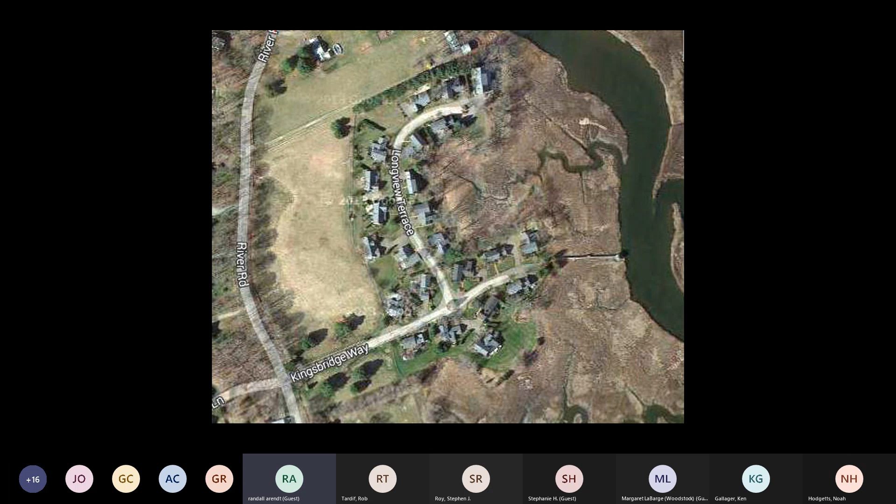So the view from River Road is a view of protected open space with subsurface septics, individual in this case. And the view from River Road, which is over here, is across the property to this village, which they built on about 10,000 square foot lots. And the individual systems are located out here.

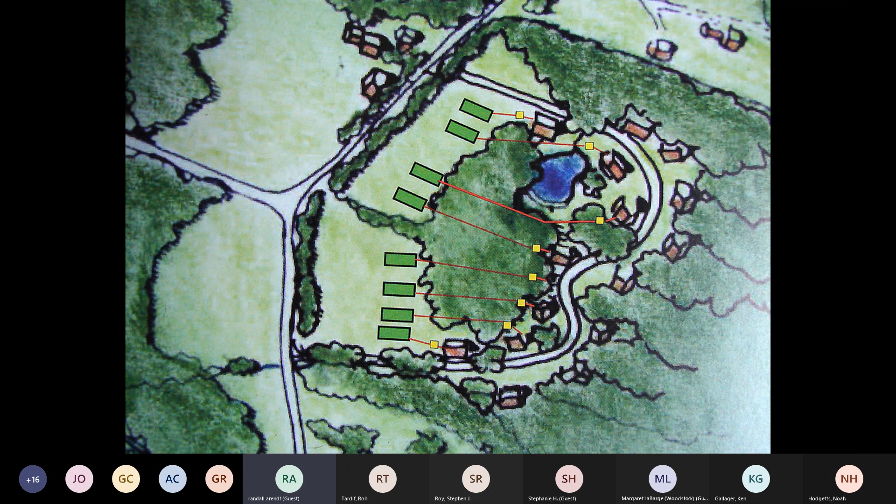An advantage of individual systems is you control it. Another advantage is the developer doesn't have to build a community system, which takes more money up front and longer approval time. A benefit for the community, the town, is that if the system breaks and needs to be repaired, you don't have 10 units going offline. You've got 1 unit going offline because his system failed, and he has the responsibility to fix that system. It's as simple as that.

So you could never get a layout as beautiful as this. This looks like a time capsule. Was that built in 1780 or 1980? 1980 is the answer, and conservation design was the reason.

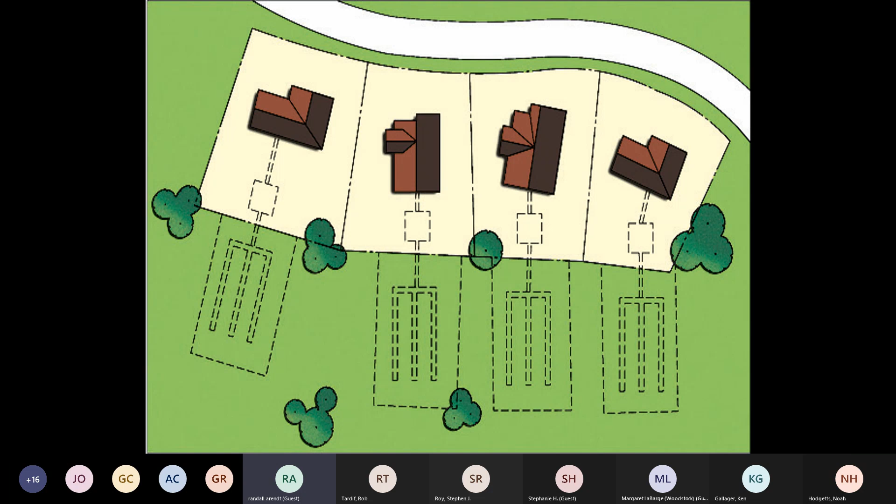Typically, you have enough room on a small lot for your septic tank. The rules for the condo association, home association, should mandate that each one of these people pump their systems every 3 years, or the home association uses its dues to pump everybody's septic tank every 3 years. So the leach field never clogs up, or its life is extended a long time because you've got this periodic pumping of the septic tanks.

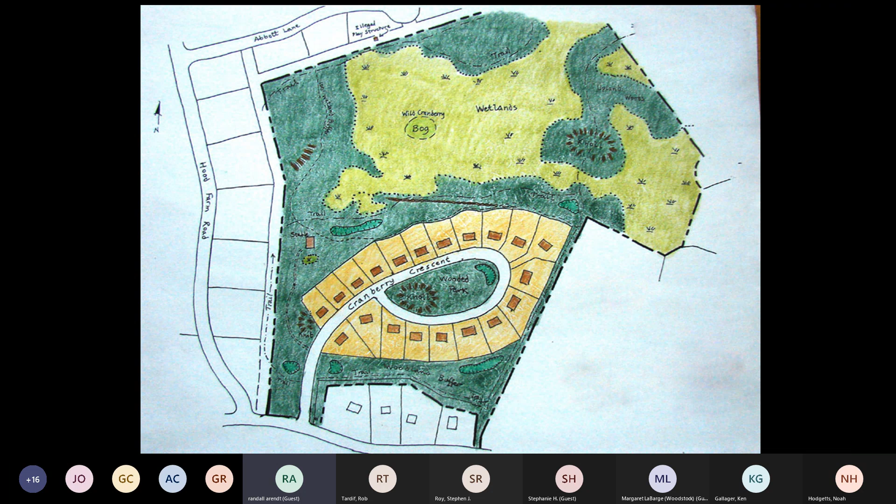Off-lot community septic is like where you have a layout like you had in the last picture, but there's a community system instead of 10 or 20 individual systems. The community system is right here. I designed this one in Ipswich, Mass, about 15 years ago. Their central open space is actually a bit of a hill.

And this is a nice flat, dry piece of land. Back in here is a mixture of uplands and wetlands, so we didn't want to get back in there with the houses. Yeah, you could put houses back in the upland portions and stretch out the road system, but keep it nice and compact. Keep your conservation area nice and unfragmented.

So the homes here are fairly close together. They're fairly upscale, and they all drain to one central drainage field and septic system. This is a rain garden, which I designated in an area by the roadside. I did not design it, but I said, this is how you should handle your stormwater. We had a great landscape architect with an engineering partner design it.